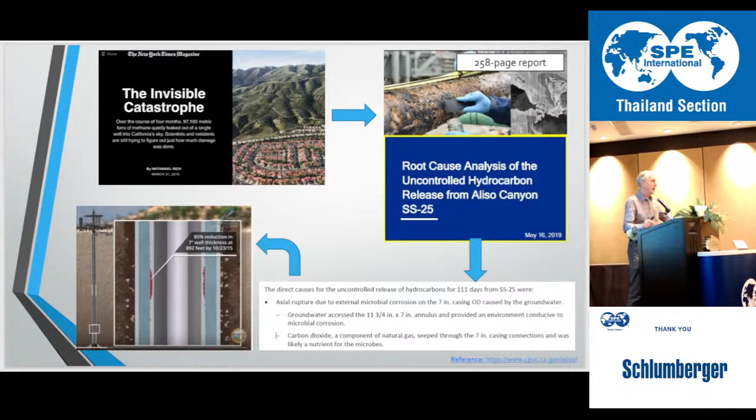It was kind of called the invisible catastrophe because it didn't catch fire, and there wasn't huge public media attention to it, but it was extremely costly to correct. They had to drill a relief well to kill this well. It's actually a gas storage well that had been repurposed from an old and depleted oil field, and there was a very long investigation.

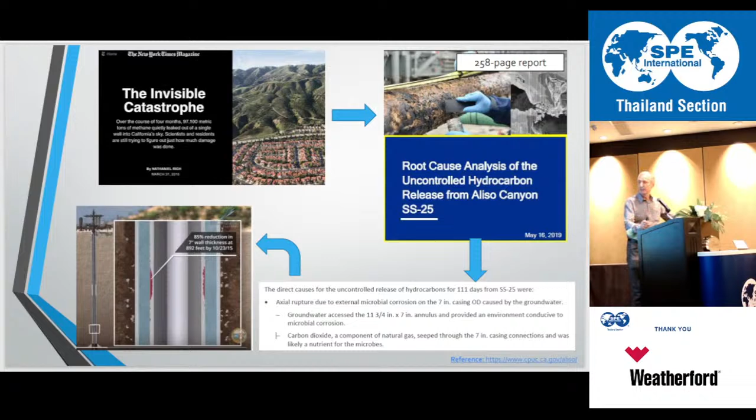It actually happened in 2016. The actual report came out in 2019. It's public knowledge, you can go and download it, it's 200 and something odd pages. But the actual summary of what happened is kind of down here: it blew out for 111 days of an uncontrolled escape, and about 1,000 families had to move away because this was on the outskirts of Los Angeles.

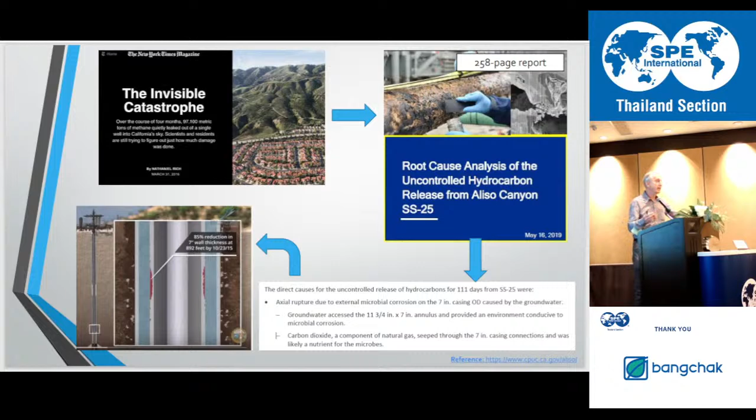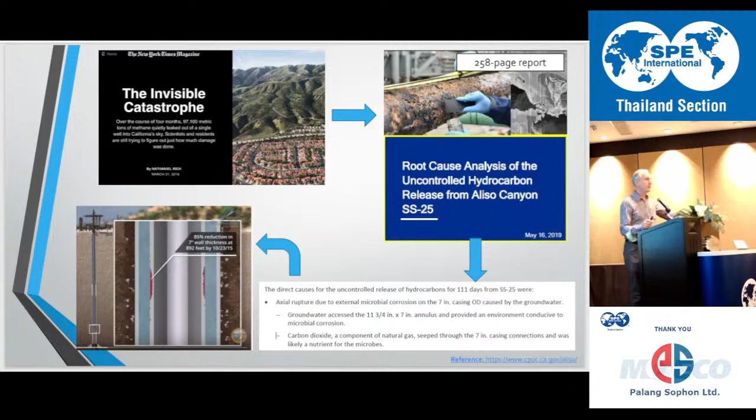When they looked at it and went back and analyzed it, this was related to a well integrity problem, corrosion in the casing that allowed the gas to escape on the outside, eventually on the outside of the conductor pipe, and as I said, they had to drill a relief well to kill it. You may not have known about this event.

It was very public, but there are many other similar events that occur worldwide, unfortunately still happening today. A lot of them go under the radar, as it were. They don't catch the public eye as much as Macondo did, for example. But all of these could have been prevented.

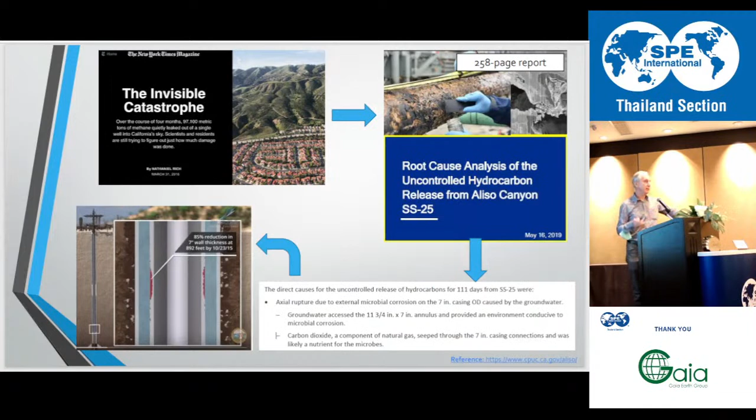So today we're going to talk a little bit about the technologies that are out there today. This is an example, not that one, but a similar example from California, of a well that is being monitored as a result of the Aliso Canyon incident. Now operators are taking much more concern and placing much more importance on surveillance, and this is a well that has a problem and is under investigation.

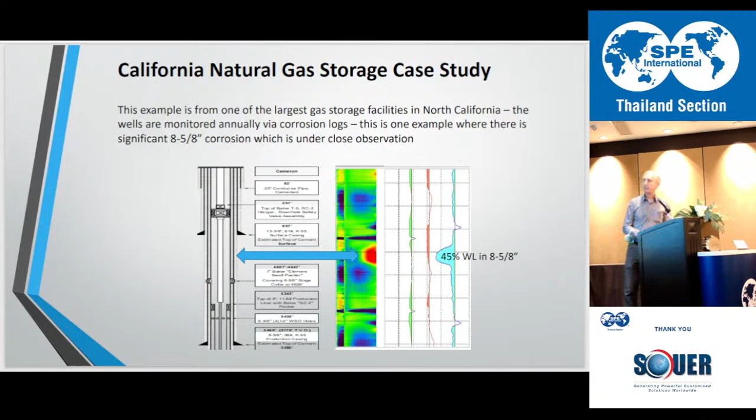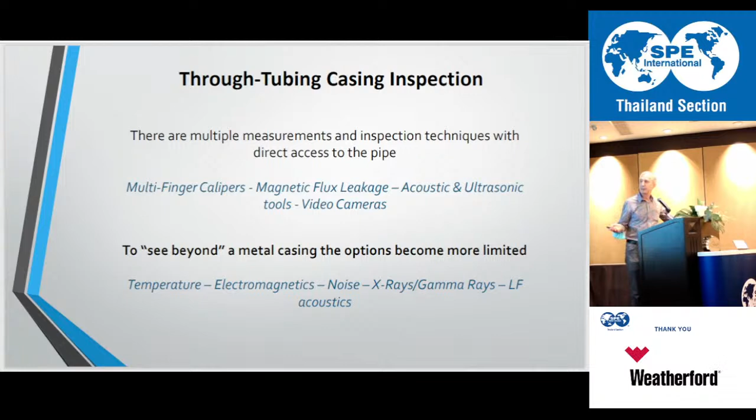So what are we really talking about today? We're talking about measurements for casing and inspection techniques. I've split it here between what I call direct access to the pipe - that's very common, you can run different types of tools in your well, whether it's multi-finger calipers, flux leakage tools, or ultrasonics, and you have direct access to the casing you want to measure. That's been around and been done for many, many years.

Video cameras as well, for example in gas wells. The difficulty is if you want to see beyond the pipe and behind the pipe, and be able to monitor what's happening in your second, third, or even fourth casings - how do you do that? You've got to look through the metal, and you've got to be able to make measurements behind metal. So that type of measurement is way more limited.

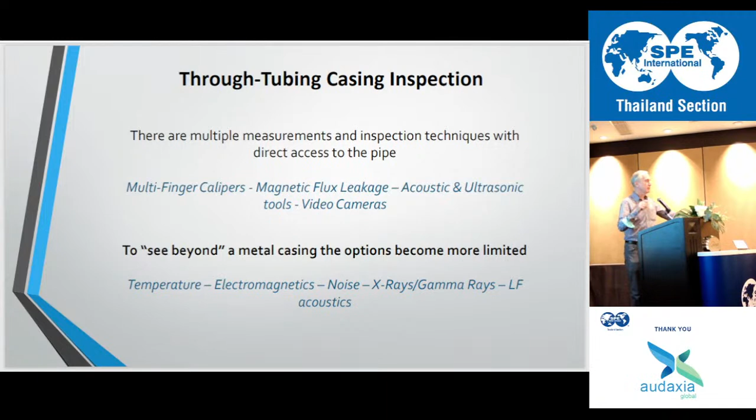Temperature is very common, and in fact in the Aliso Canyon case, the regulations at that time said you had to run a temperature log every year. Well, of course, by the time you have a leak, it's a bit too late. So temperature is kind of a reactionary thing rather than a proactive one.

Electromagnetics - you can look through metal with electromagnetics, which we'll talk a little bit more about. Noise - you can imagine listening through multiple pipes, so there is propagation through there. X-rays, like you do at the airport, you can see through things. Gamma rays, and actually low frequency acoustics as well, which is something that's coming along in development. So we have more limited physics measurements we can make.

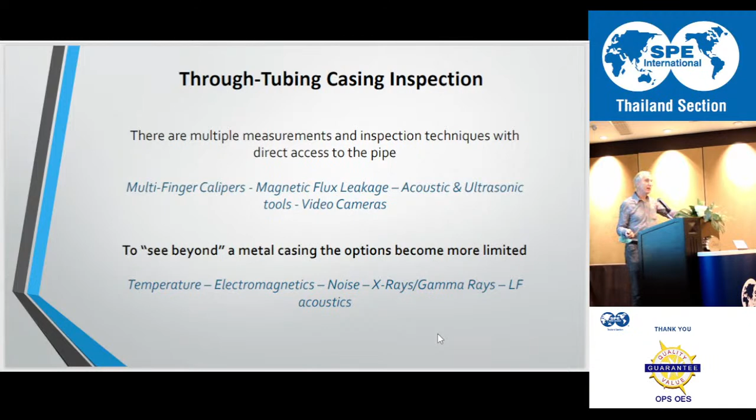Can you hear okay? Maybe closer to the mic. Sorry, are you hearing me okay now? Yes, it's better. Okay, I'll move it closer. Right, okay.

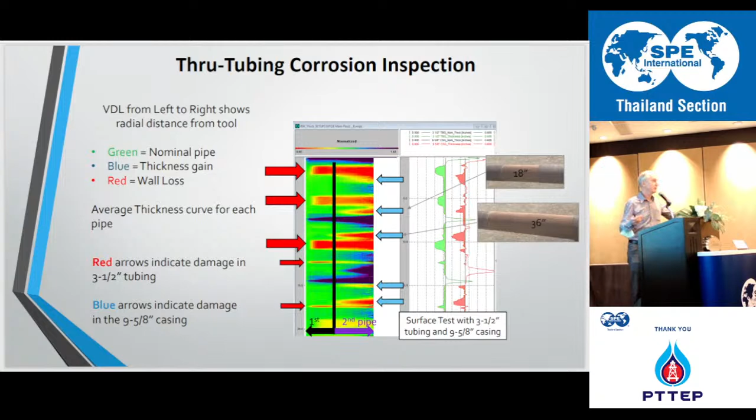Very simple kind of display here. Green is good. Blue is metal increases, that's usually the collars, and red is not good, meaning you've got corrosion or thinning of the pipe. So you can see in this case we have a way of differentiating between inner and outer pipes. There were two pipes, the inner and outer. We can see corrosion happening on the inner pipe, and corrosion happening on the outer pipe. So this is a type of technology that can be used to look through your first pipe, tubing or casing, and look beyond.

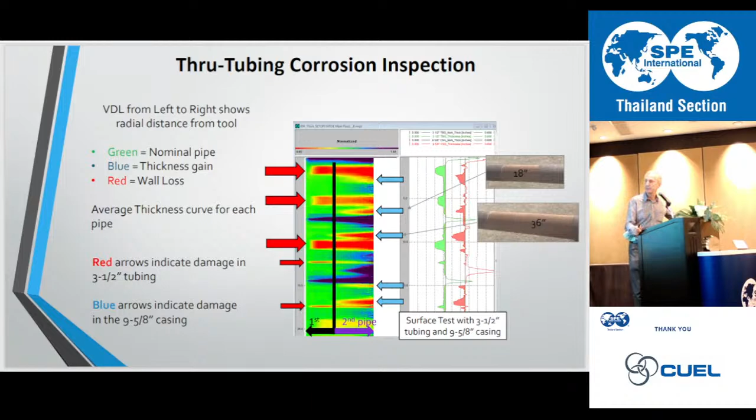This is an example from Canada, where they have a lot of steam wells, huff and puff, which puts a lot of strain on the casing. The operator used to have to pull the tubing and run a log in the casing to detect casing breaks. But now we can do that through tubing, so they can go out on a rigless unit and run a log to determine a casing break through tubing.

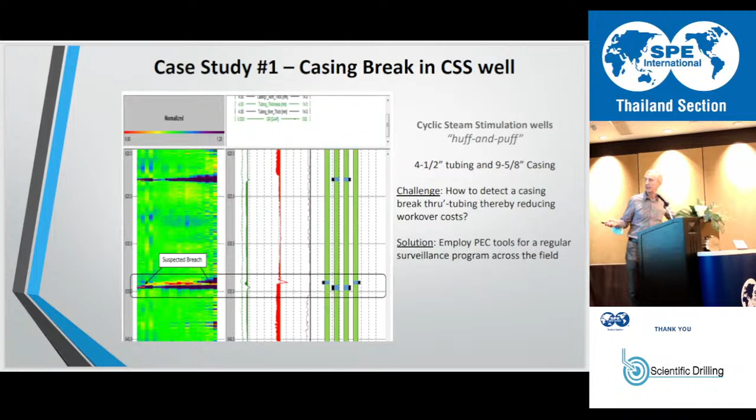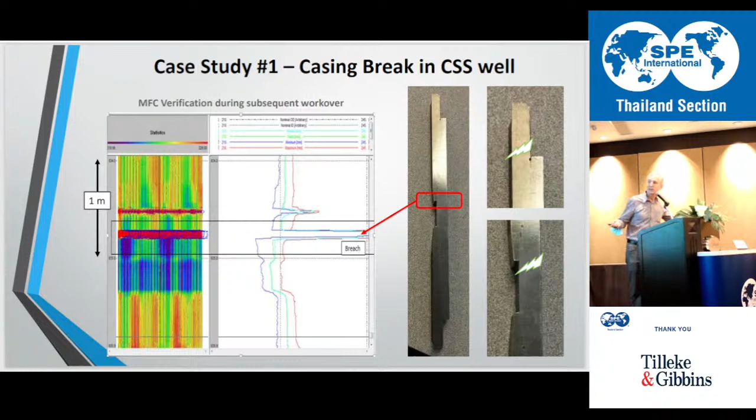These breaks typically happen at the collar connections. There's a weak point, usually right here or right down here. When they thermally cycle these wells after multiple thermal cycles, you end up with a break. This is just a caliper log that was run after they pulled out the tubing, to verify there was actually a break right above this, or right in this collar connection. But as I said in the previous slide, we can actually see it right here and detect that through the tubing.

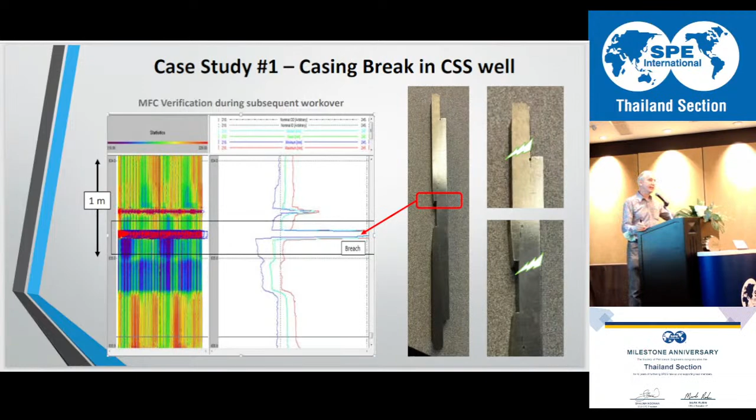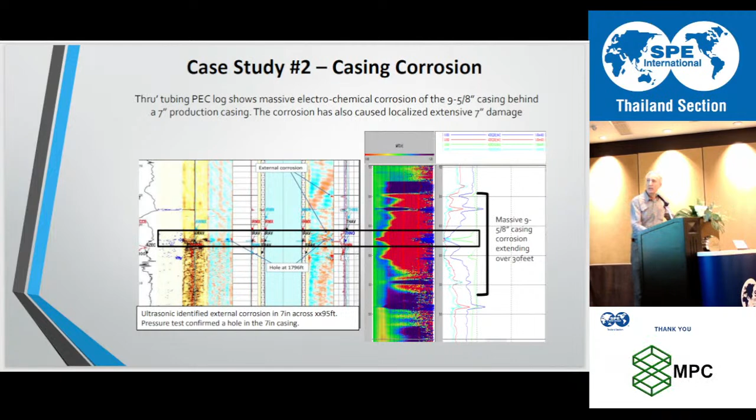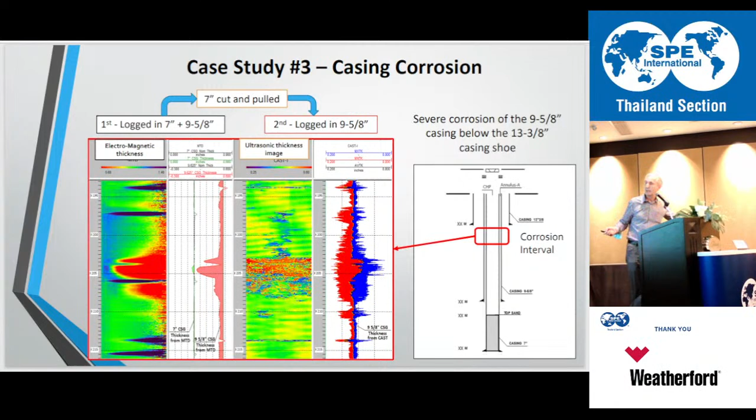I pulled this example because it's a very similar well schematic to the Aliso Canyon well, where just below the conductor pipe there is this significant corrosion going on. In this case it hadn't got as far as the 7-inch yet, but if you waited long enough, you would have had exactly the same scenario where the 7-inch would have leaked right through to the 9-5/8s. Usually this surface casing cement bond, if it's even cemented, is typically very poor, so once you've got pressure here, you've got escape up to the surface.

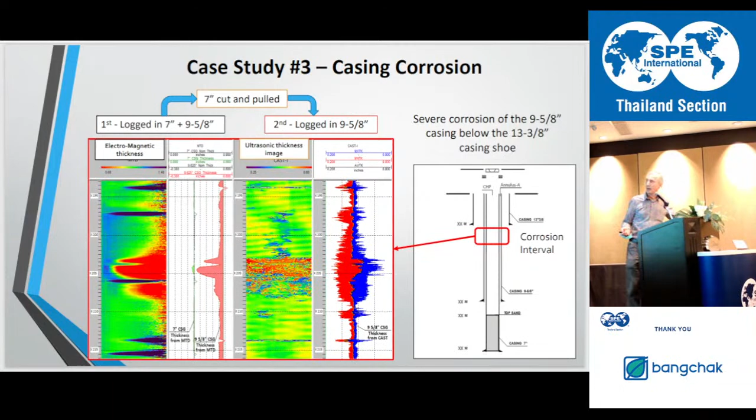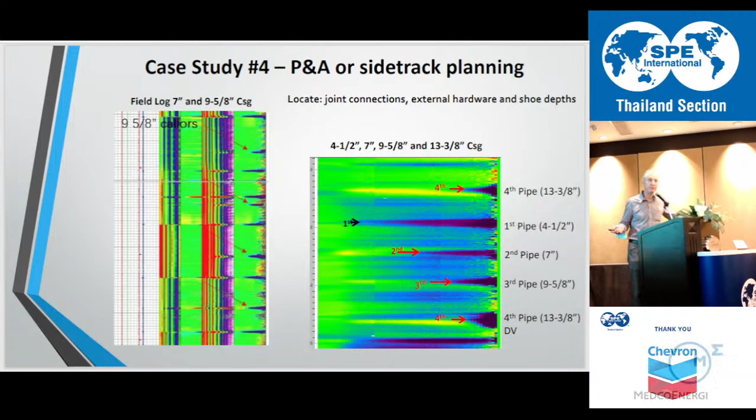Another well, this is just a very simple example, but this is a well where you've got multiple pipes, from 4.5 all the way through to 13-3/8. Sometimes you want to do a sidetrack, and you want to make sure you pick the right depth for the kickoff point or whipstock setting depth. It can be helpful to understand where you are in the well by looking at the collars.

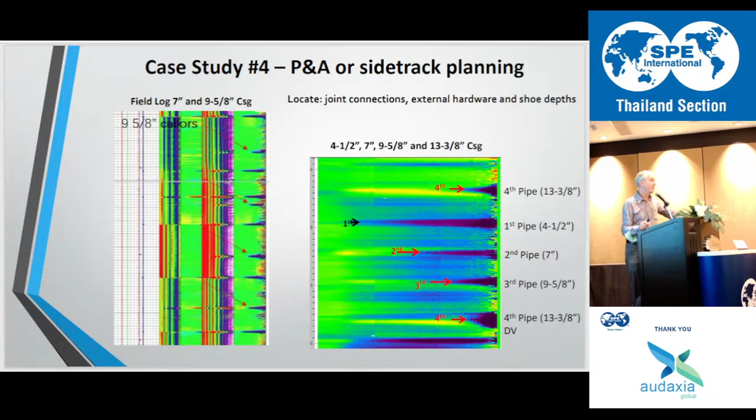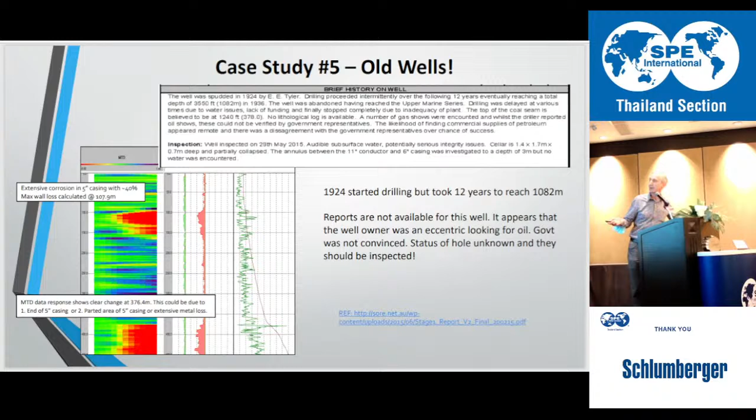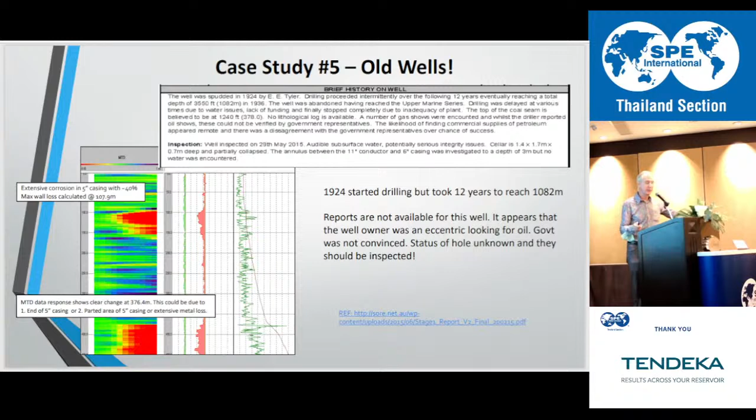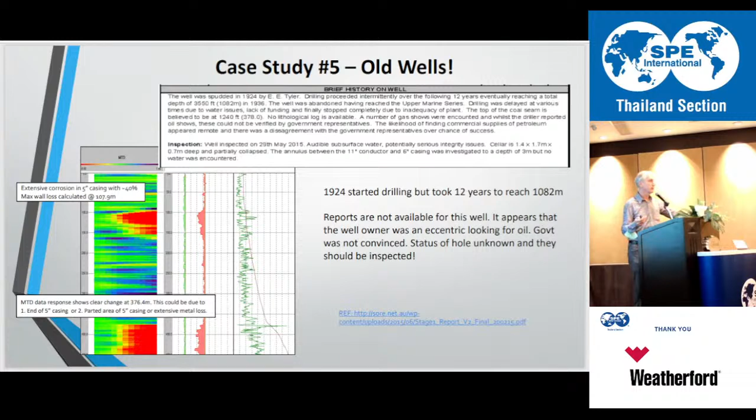But there was an interesting backstory on that well, about the guy that drilled it - it took him 12 years to drill it. There's a reference here, you can go and look it up and learn all about that old well. And of course there are hundreds, if not thousands, of these orphan wells all over the world that need plug and abandonment, and understanding corrosion in those wells to properly plug and abandon them is very helpful.

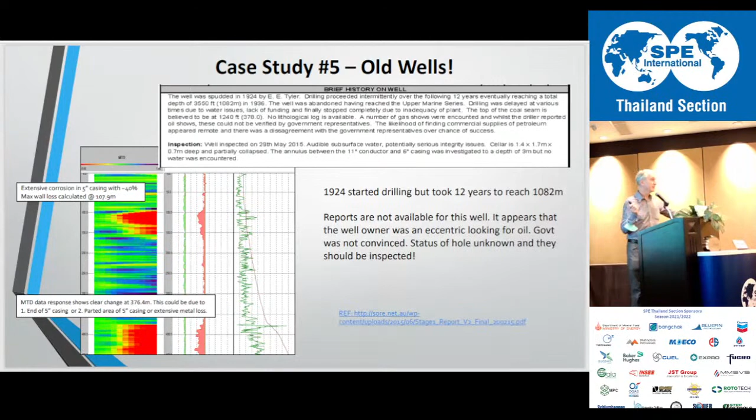You can take some lessons away from that. But similarly, whether you're dealing with a CO2 producer or a CO2 sequestration well, corrosion occurring, particularly shallow - this is very shallow, from aquifers and groundwater. If it's this shallow, you get a lot of microbial corrosion that has to be taken care of, particularly if you're repurposing old oil fields, maybe for carbon capture - this problem is more pronounced.

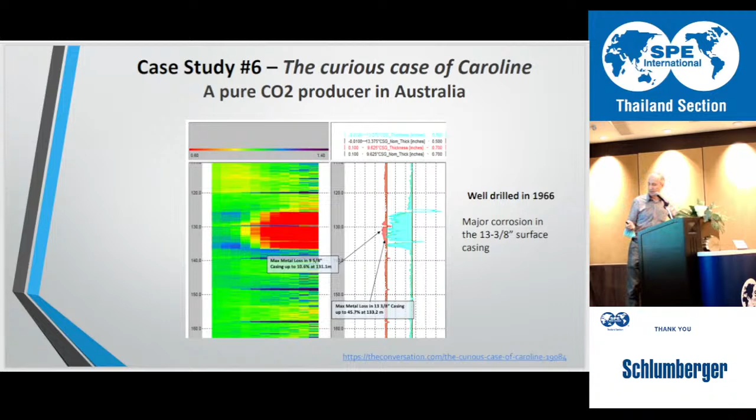So moving over to other technologies, as I mentioned earlier, we have EM, which we've covered, looking at corrosion. We also want to be able to detect leaks. Corrosion is good to predict beforehand, a proactive approach to monitoring. But sometimes you'll have pressure in the annulus, and you want to be able to evaluate that.

So why noise? As I said, it's because it can pass through the pipe. You can hear activity that is occurring behind pipe - leaks that are in the casing, for example, or leaks from packers and such like.

Noise is not new, it's been done for many years. Some of the very old hands may have experienced listening through headphones to essentially a downhole microphone. It's a bit more high-tech these days, where we can make those measurements and display the logs, but the same principle applies. Leak detection through multiple tubulars covers all sorts of different potential problems.

Sustained pressure, annulus pressure, whether that's your TCAs or CCAs - this is a good way to diagnose that. But you can also use that for cross flow, looking for activity behind pipe. Maybe you've got a low pressure zone that's taking fluid from a higher pressure zone up above, and it's flowing behind the pipe - that could be due to channeling in your cement, for example, cross flow. In some areas you can even look at fracture flow and better qualify some reservoir information through that.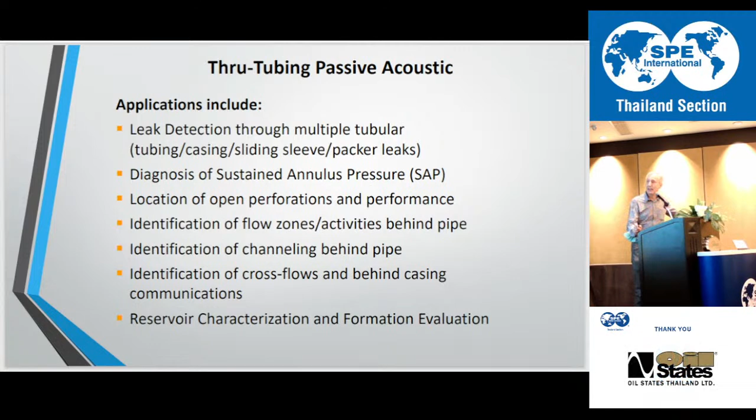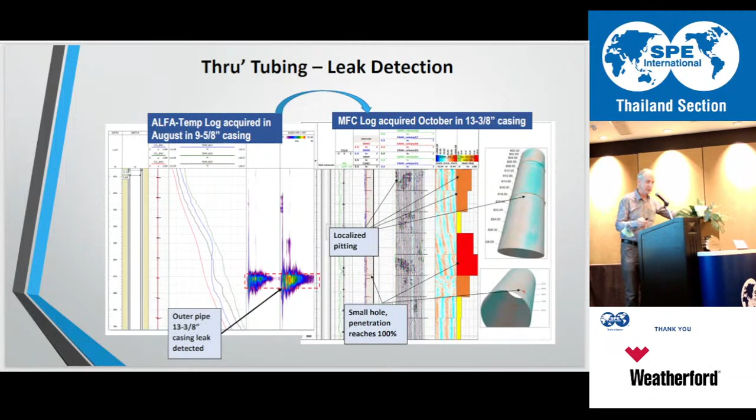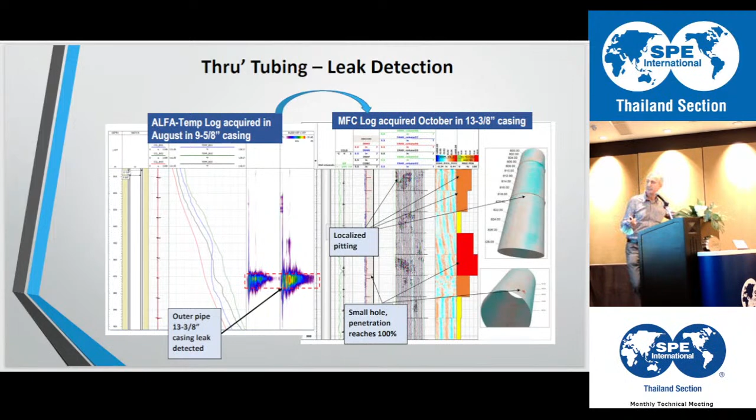So that's an example of the type of through-tubing log we can use for leak detection, but also some verification. This is a log from this part of the world. I put this in here because it's also interesting.

There's a little video that goes with this, so we can clearly see some gas bubbling around the wellhead in the cellar here. When we went down, we can see the activity very shallow, escaping here. Something's going on in the well where activity is escaping up, and this is the point where it's passing through the pipe.

But there's also some indication that it's moving up and down at very low frequency here, which is typical for cross-flow type information. This is obviously something you really don't want happening to your well. There have been cases, I think in the Gulf of Thailand, where this is bubbling at the mud line subsurface, and the ROVs can see that.

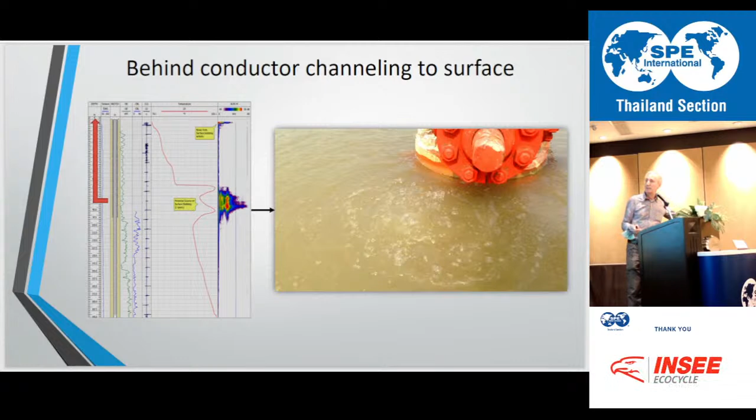This is another example where eventually the operator actually pulled out the tubing to verify the actual leak problem. In this case there are some little videos here. There were actually two leaks in this well - one pretty clear, a humdinger of a leak right here, and something slightly less clear, not quite as loud or aggressive.

When they pulled it out, you can see on this upper video the leak that's occurring right here, pretty clear - it's flowing through the connection. This is a collar connection on the tubing. This is pretty common - if you see a tubing leak, most of the time it's going to be right at the collar connection.

You may have a hole in the tubing, but that's typically what we see. Down here is going to be a smaller leak - the guy's pointing with the stick there. If you zoom in, you can see kind of dripping coming out of the connection right there as well. Just a pretty slow leak, gives you an idea.

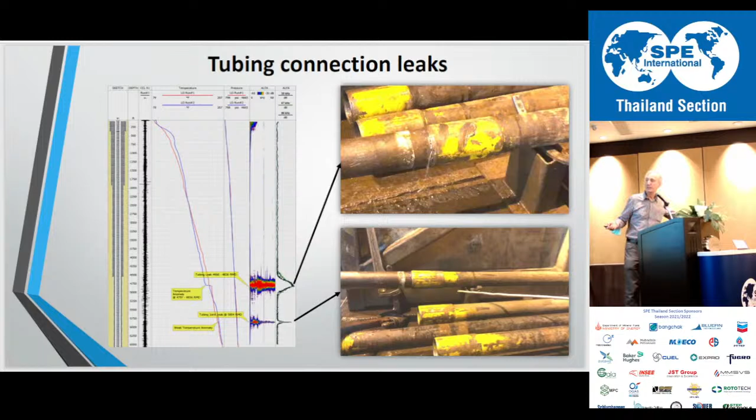This is obviously pressured up here with water on the tubing, and this is very typical. In this case there's a temperature log here - you can see the temperature inflection.

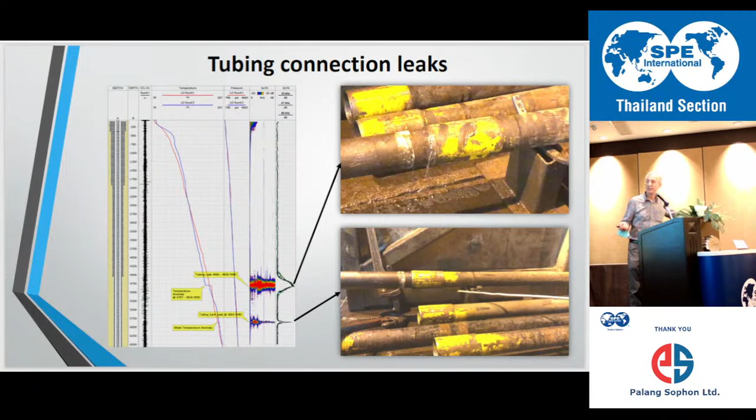This humdinger of a leak shows up on temperature, but this smaller one down here, just drips coming out, doesn't really show up on the temperature at all - it's not clear, which is quite typical. If you want to rely on a temperature log only, you would have missed that. You never really know if it's due to a leak or some other formation activity happening here. Anyway, a very nice graphic example of what's happening.

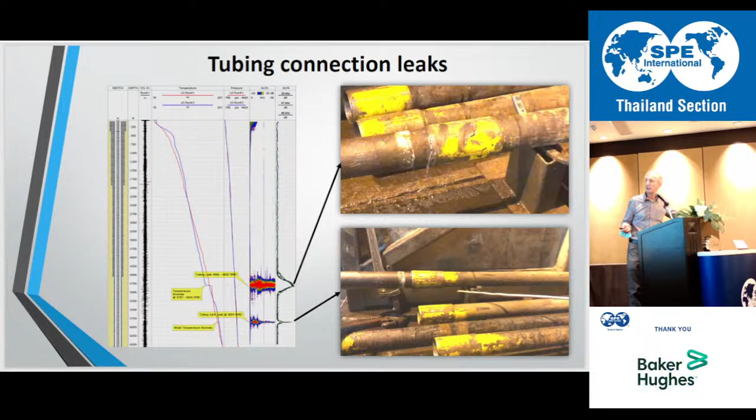To complement other things, it will also be helpful to have a CBL log as well, and even the EM log through here. But again, I don't want to go into all the details, but just to highlight that noise is very good to look at behind pipe.

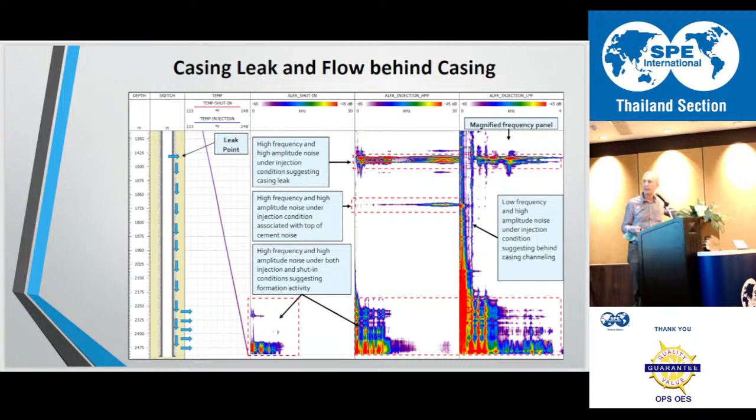This is another little example I have, which is related to distributed fiber optics, and it's a temperature log on a very deep gas well. There was known to be a tubing leak because there was annulus pressure on this well.

They had fiber optics, this is temperature data. From the temperature data, you zoom in and we could see what looks to be like three hot spots in the well here in the temperature. So here, the well was shut in. They went ahead and opened the annulus. Right here, we can start to see some cooling going on here. So there appears to be a leak.

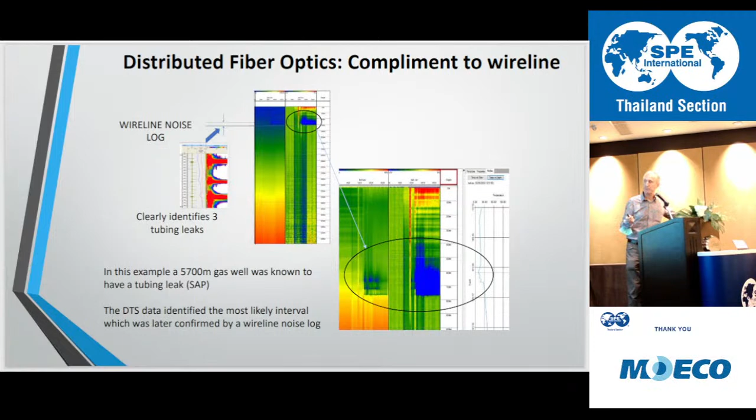At the bottom of that, there's an acoustic log here, and this clearly identified a connection leak here, here, and here that tied in with this log. So in this case, it was a combination of both, where the fiber optic data allowed the whole well to be surveyed. So it's a pretty deep well. If you wanted to log the whole well with a typical logging tool, it would take a long time. Here, you could identify this very fast, and then this was a very short log over that interval to identify exactly the leak. Unfortunately, when they went in to repair this well, there were other difficulties, but that's another whole story.

So changing subject now, we're talking about through-tubing measurements. This is using magnetic measurements, so a different type of measurement now. This is looking at tubing eccentricity and casing deformation. So again, looking through the tubing, trying to understand what's going on in the casing behind, or how the tubing is inside the casing.

So what I'm showing here is a section of the well, where the outside is kind of faint, but the outside is the casing. This is the tubing inside the casing. It's kind of a zoom in here, and you can see this is the outline of the casing. This is the tubing, and we can see some kind of buckling and some other problems happening inside the tubing.

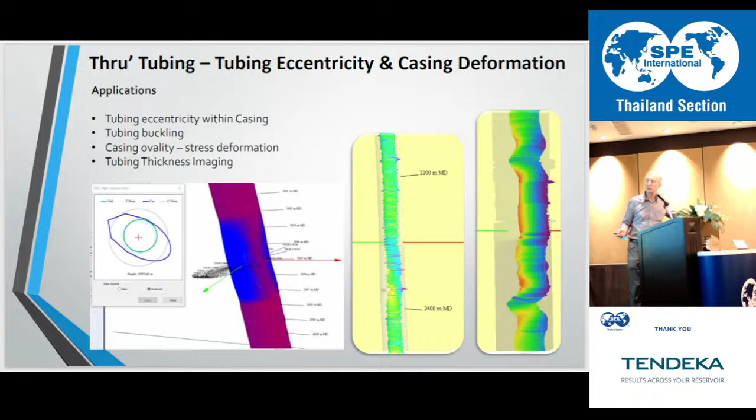The tubing is sitting right over, touching the casing through here, and we can see in this case right here, the casing itself has been severely damaged through this section of the well right here. So the tool is inside, where we can see the tubing and we can see the casing outside, and it's been essentially squashed, the casing.

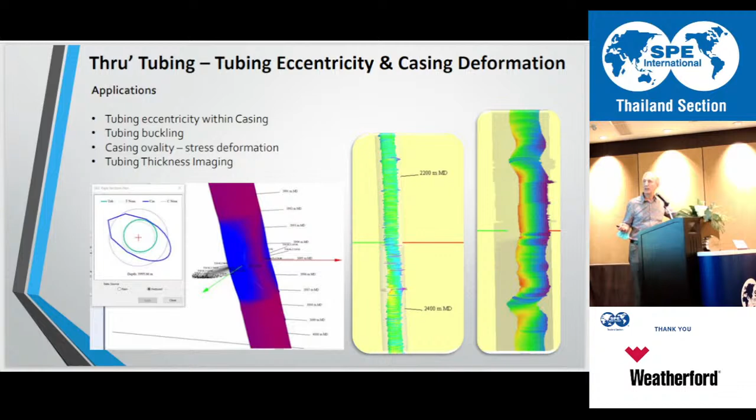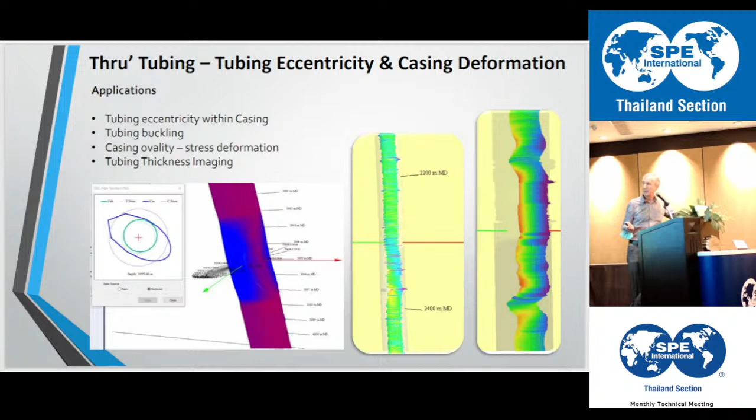So you can look at casing ovality, you can look at tubing buckling like we have here, and also the eccentricity inside the casing. And this can be helpful for wells where you have, so this again is an example where the well had significant problems. The actual casing was completely broken right in there, and the casing itself had sheared over, and we had significant eccentricity, and it flipped over 90 degrees through there. So there was also severe casing deformation through there.

So the casing has been deformed. That's caused a localized problem where the outer casing has been deformed, and the inner casing has been stressed to the point it's actually broken at this collar connection right in there. So a pretty extreme example of the kind of geomechanical forces that can occur.

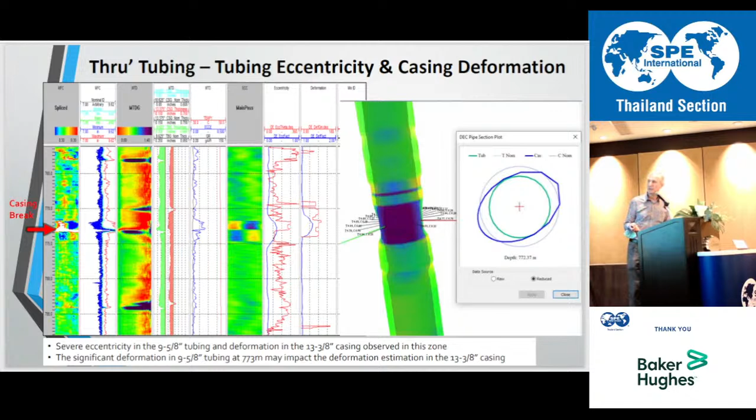And this is just connecting things together. So one of the difficulties with all the through-tubing measurements, looking at corrosion, is that the geometry is very complex. You've got tubing inside casing. Where that tubing sits has an effect on all the measurements around the tool.

So in this case, this is an example where we have this kind of EM type of measurement through here, and we have this deformation information through here. We can see in this zone the tubing has some buckling going on. It's been pushed over to one side, and we can also see that on the EM log. This kind of blue section through here is due to the fact that the tubing has been severely eccentered inside the casing.

And that could be helpful if you're trying to understand the centralization of the tubing, trying to understand this type of log itself. We want to understand what's happening in these measurements. So by combining things together, we can have a better understanding of what's happening behind your pipe.

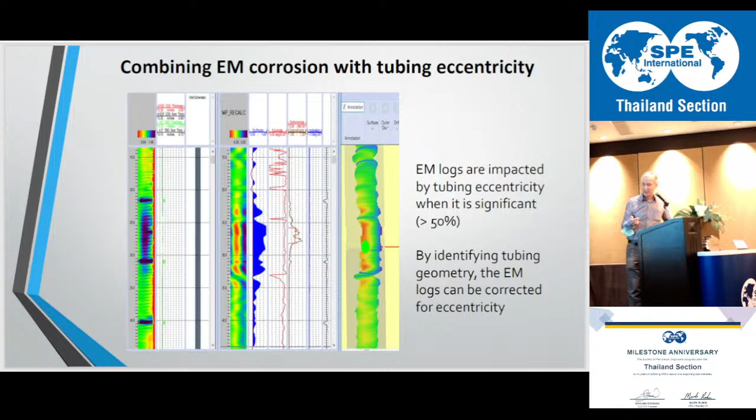So it's just a flavor of some of the measurements that are out there for through tubing - small tools that run through tubing to measure beyond the tubing, looking at casing, looking at beyond casing. And why is that important?

This is a little bit of an old slide, but this relates to well integrity problems. There was a survey done a few years back showing a significant number of wells globally with various types of well integrity issues, and fixing those is an extremely costly endeavor.

What I've seen is a lot of reactionary approaches to well integrity - waiting till there's a problem and then going out and trying to fix it. And that's invariably too late sometimes, and costly.

I've seen cases where customers have come and said they can't even pass a tool through the tubing, but they want to evaluate what's going on outside the casing. But at that point, the tubing's so badly pinched off that it's really too late to even get a tool through there. So there are measurements that can be made in a more proactive way to understand what's happening before it becomes a problem.

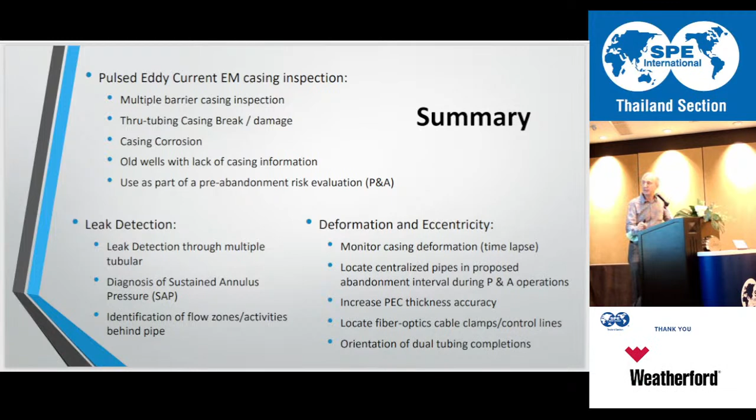There are tools for looking at the geometry of the tubing, so you can look at deformation in casing. I have a case in an area of the well where they have salt that is creeping, causing the wells to be deformed. It's an active earthquake area, and every time they have an earthquake, these wells shift even more, to the point that they can't enter the wells.

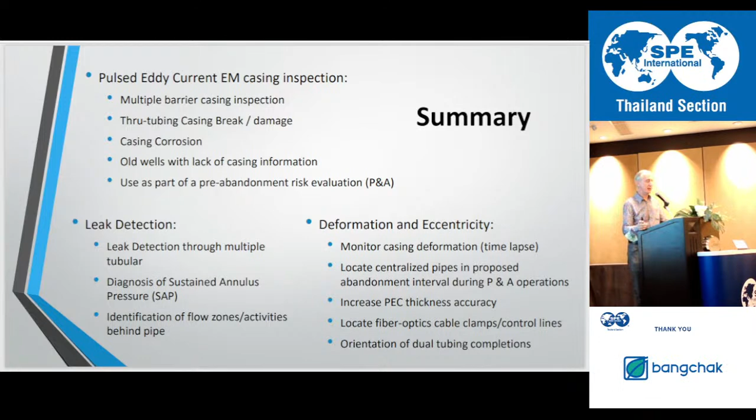By being able to do through-tubing monitoring of the deformation, they can get a sense of how quickly things are progressing, and they will then do a P&A before the well gets to a point that they can't enter it anymore.

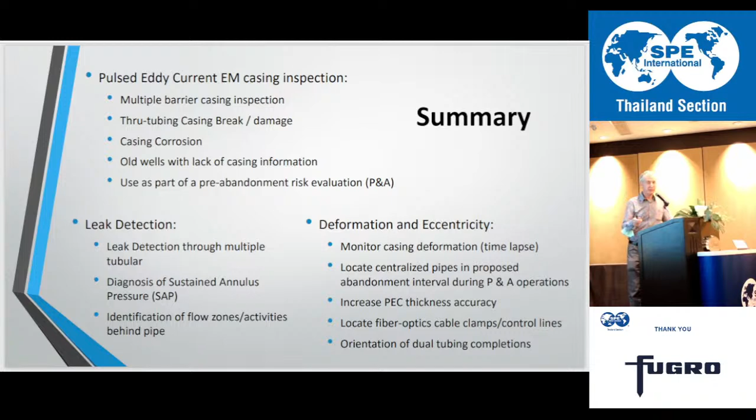As I mentioned earlier, there are a lot of orphan wells, a lot of wells at the end of life, and P&A is going to become more and more important over the next 20 years as we need to deal with what we've already produced. So making measurements to minimize or streamline your P&A programs is helpful.

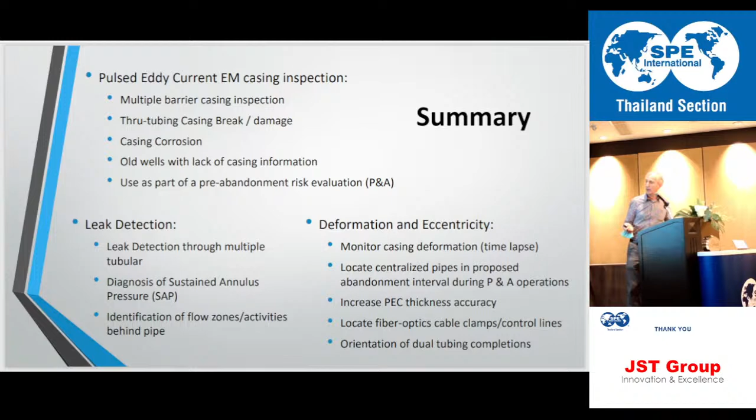And what else is coming? We think there are other possibilities for through-tubing measurements. We haven't talked about cement evaluation or barrier isolation through tubing.

Particularly in the P&A market, if you want to verify that before you go ahead and plug everything off, that your casing is well cemented or well isolated hydraulically, currently you'd have to pull out the tubing and run logs inside it. If you can do that through tubing without pulling it out, you can potentially save a significant amount of cost there.

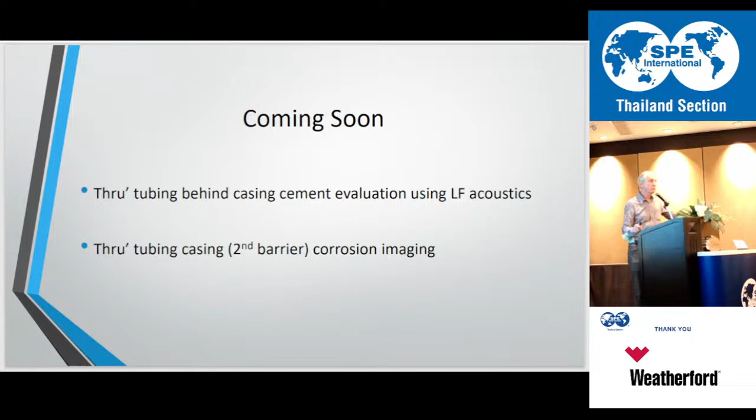This is actively being worked on. It's a complex problem - it requires low frequency acoustics to do that. People also want to look at azimuthal measurements, not just a simple CBL type measurement, but they want an idea of how well the casing has been bonded. That adds to the complexity of these types of measurements.

But these are coming. Another area is looking at the average corrosion around your pipe. If you can imagine in your casing you've got a hole - if you take the average wall loss around 360 degrees, a hole will not be 100% wall loss.

It will be less than that. So if you can actually image the casing thickness, that improves your corrosion measurements through pipe. That's also being actively worked on.

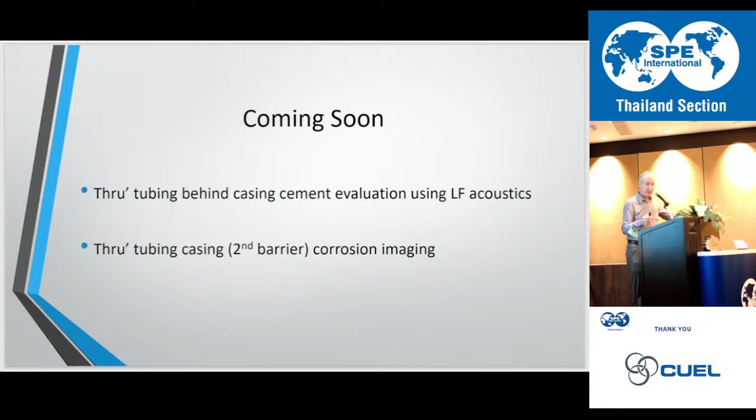So that ends my presentation. Hopefully that was quick and not too many squiggly lines. Any questions?